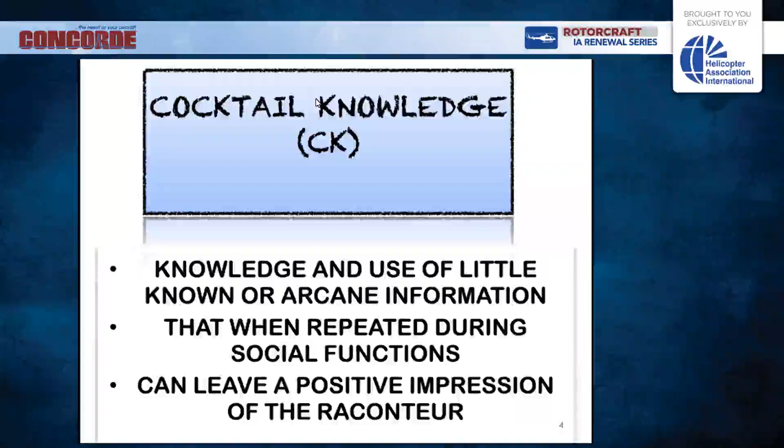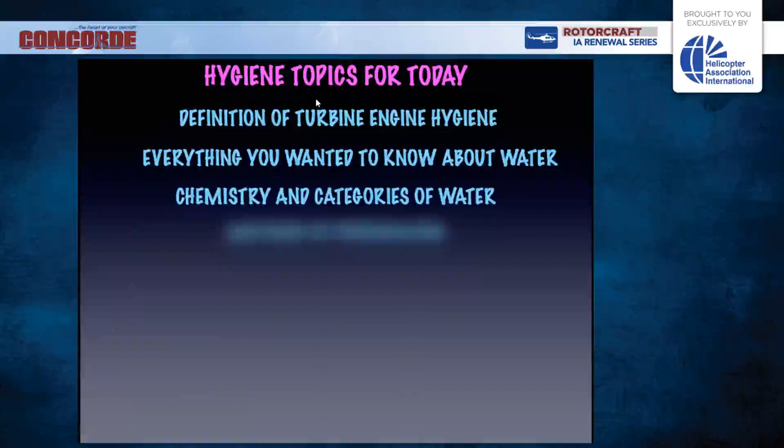So the topics for today: we're going to have a definition of turbine engine hygiene. We're going to talk about everything you always wanted to know about water. We're going to talk about the chemistry and categories of water, methods of purification, chemistry and agents of corrosion, air and airborne contaminants and erosion, a brief review of turbine engine operation, and then the benefits of proper turbine engine hygiene.

So I equate turbine engine hygiene much to like brushing your teeth. And I'm sure if I was to ask for a show of hands, everybody would say that they all brush their teeth. And when do you do it? You do it at night. That's the last activity that you do before you go to bed. And you do it so that you can keep those teeth rather than have them replaced by some choppers.

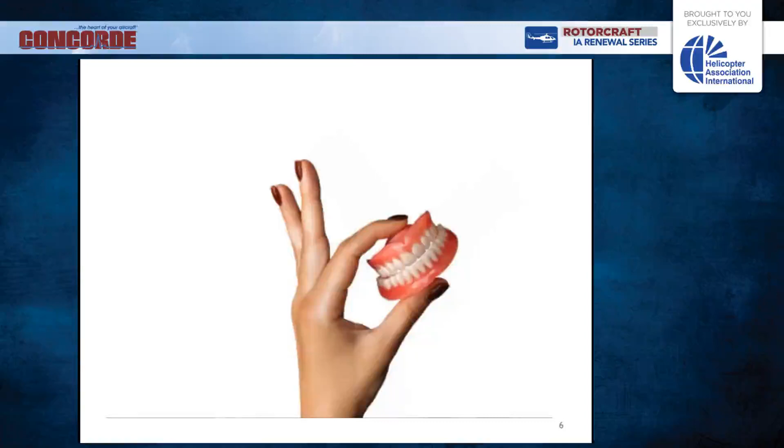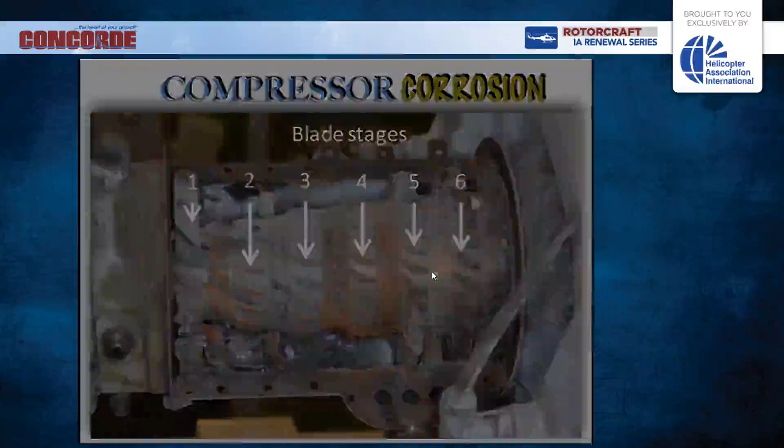So what is turbine engine hygiene? It is an engine cleaning function that, using dihydrogen monoxide as the medium, when routinely performed is conducive to prevention of corrosion, preservation of engine performance, and reduction of operating costs. And we'll go through each one of those things as we progress.

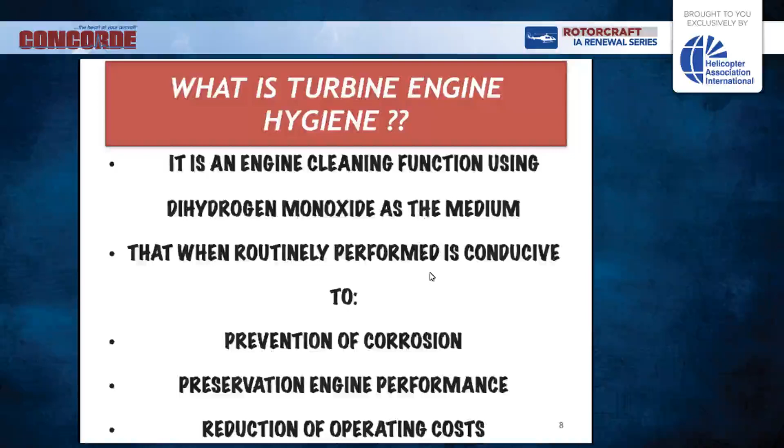OEM recommended solution for turbine engine hygiene is dihydrogen monoxide. Cocktail knowledge alert, that's our first one. What is dihydrogen monoxide? It's water.

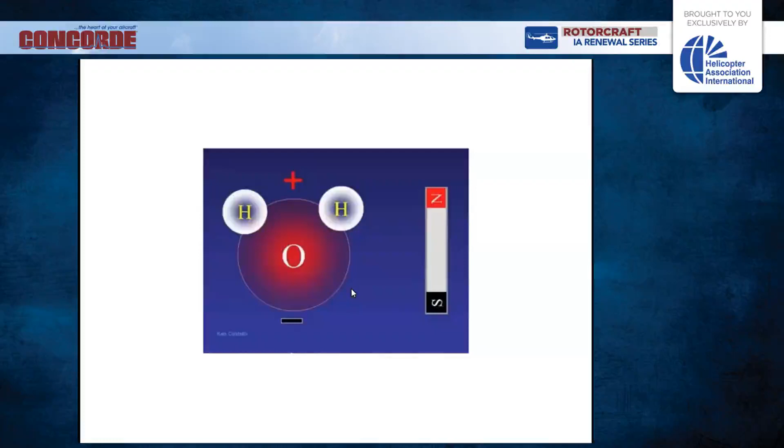The chemistry of water is such, it looks like a little Mickey Mouse face here with the hydrogen ears on either side, the positive side of the molecule, and oxygen with the smile, or negative oxygen. They are attracted to one another. This forms H2O, or water. These droplets all get together. They have a north and a south pole, the positive side would be north and the negative side would be south. They are attracted to one another, and as they attract to one another, they form drips or drops like you see here. And the drops all get together and form a big collection of water, as you see here.

So water is a multi-purpose liquid. By that, I mean water is colorless, odorless, and tasteless. It's essential for the sustenance of life. It's an additive to food and beverages. It's a coolant for engines and machinery.

It's a household cleaner. It's used as a fire retardant. And it's the universal dissolvent.

All of these I'm sure you're aware of, but I'm sure you don't understand what the universal dissolvent might mean. Well, let's take a look at the word dissolvent.

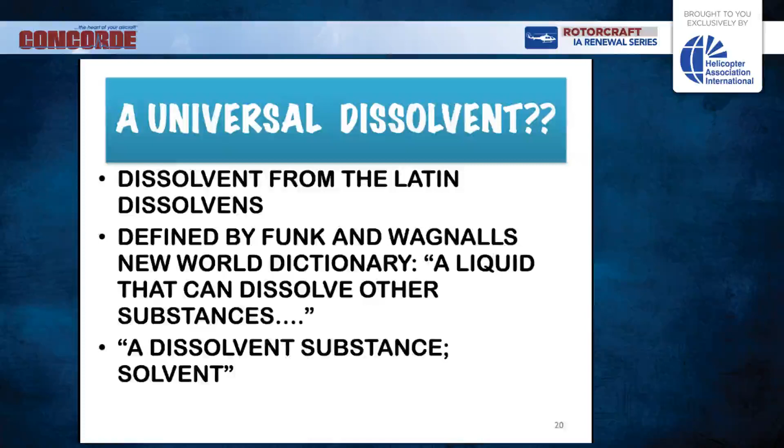Dissolvent, from the Latin dissolve, dissolvens, defined by Funk and Wagnalls New World Dictionary, a liquid that can dissolve other substances. A dissolvent substance, a solvent.

So as a universal dissolvent, water will absorb certain non-organic chemicals. This is the combination of salt, sodium, and chloride. Now look what happens when they are attracted to one another.

The positive side of the sodium goes over to the negative side of the oxygen, and the positive side of the hydrogen connects the chloride.

Let me show you in a demonstration here. Pour some water in a glass, pour a little salt into the glass, and stir it up.

And what we have is, you can see the salt is dissolved and becomes part of the solution for the water. Now, every solution is unique in its reaction to stimuli.

Let me show you what happens when we pour water in a glass and stimulate the edges of it. You'll get a unique sound out of the water.

Okay, now we have a solution of water, and we pour it into a glass and do the same test, and we'll get a different reaction to wetting the sides of the glass.

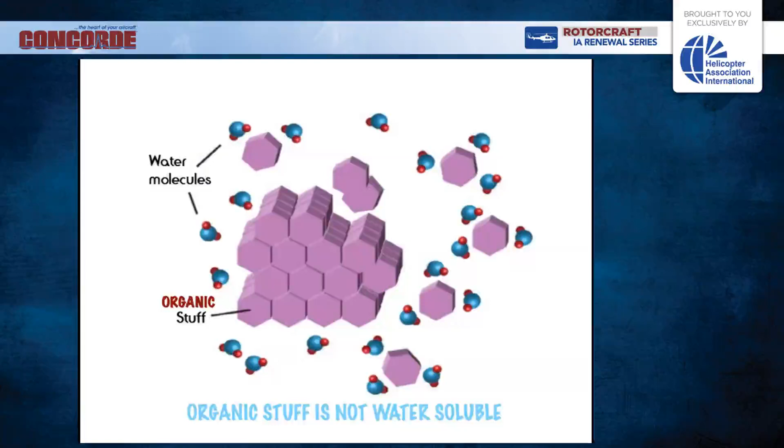But it will not absorb it like it does with salt or inorganic materials. So organic stuff is not water soluble.

And just to demonstrate, here is a mound of clay and water flowing over it. You can see that it's changing its shape. It's pushing it around, but it is not absorbing it. When we get done with this experiment here, you'll see that there's just nothing but a pile of the clay, the same amount that was there before the water flowed over it.

So therefore, oil is organic and also not water soluble. That's why it floats on top of the water. It will not be absorbed by the water. Therefore, oil is not dissolved by water.

Here's what happens. You put a water droplet in with the oil, and it is not attracted to it, they are not attracted to each other.

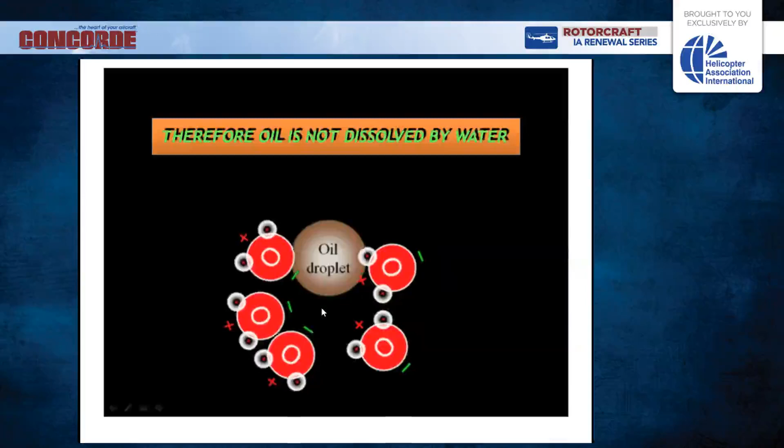So water is essential in cleaning. We've determined that. So how do we get rid of the grease and the oil if the oil and the grease are not affected by water? Water needs help when it comes to removing grease and oil.

And how do we do that? We remove grease and oil using a detergent, soap, or SO4, sulfur tetroxide.

The negative tetroxide of the SO4 is attracted to the positive side of the water.

The sulfur leg of the SO4 attaches itself to the oil, and together the oil, the SO4, and the H2O flow down the drain. So this is what happens during the chemical reaction of soap and water against oil.

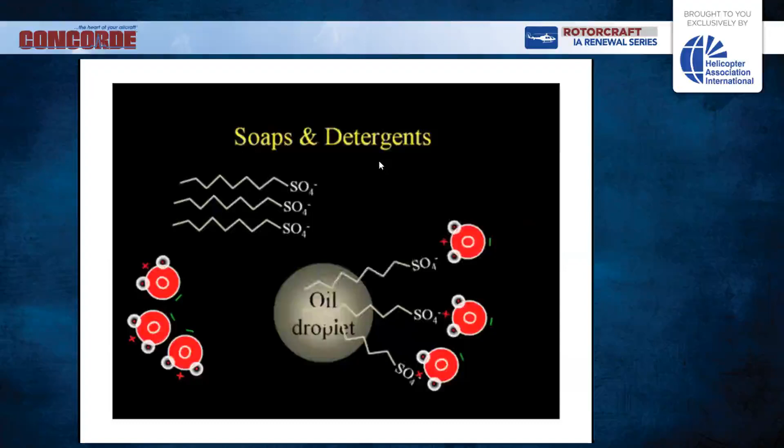And as you heat up water, just as an added bit of information, that's why your mom always told you to heat the water up. It will remove the oil at a faster rate. So that's why you heat the water when you go to wash your hands. All right.

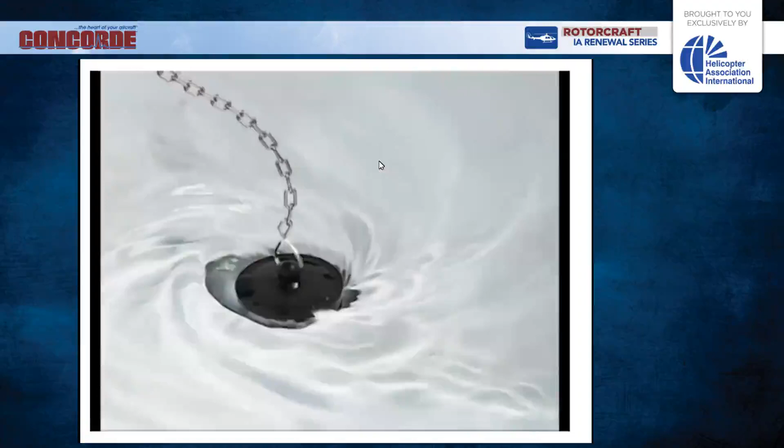So the water, the soap, and the oil all end up going down the drain together.

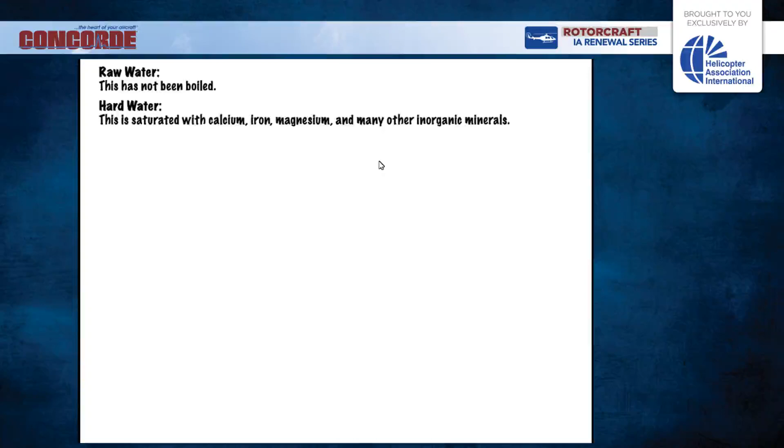So let's go through the categories of water. There's raw water, which has not been boiled. Hard water, this is saturated with calcium, iron, magnesium, and many other inorganic minerals.

Boiled water, boiling helps remove some of the germs, but it concentrates the inorganic minerals and deposits them on the side of the container.

Rainwater or snow. Now this has been condensed from the clouds. The first drop is distilled water, but when it falls as rain, it can pick up germs, dust, smoke, and minerals.

Strontium-90, a little bit more cocktail information. Strontium-90 is what's left in the atmosphere from atom bomb testing 70 years ago. It's amazing that stuff is still around. Lead and many other atmospheric chemicals.

By the time the rainwater reaches the earth, it can be so saturated with dust and pollution that it may even be yellowish in color. So water in this category is acting like an atmospheric purifier, much in the same way as it acts when it's used upon your engines to remove the contaminants.

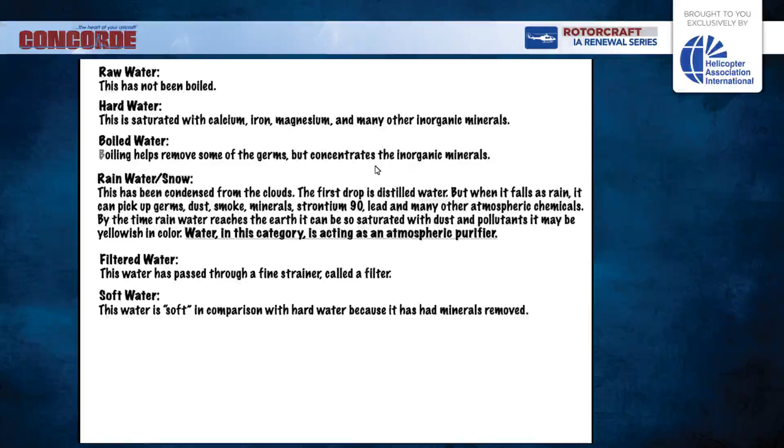Filtered water, of course, passed through a fine strainer, called a filter. Soft water. The water is soft in comparison with hard because it has had the minerals removed. Hard water has still got the calcium and stuff in it; we remove that. That's how you get soft water.

Reverse osmosis. This is a system of water purification which allows the water to be forced through a semi-permeable membrane to separate the impurities. And of course, deionized water. This is water that has had almost all of the mineral ions removed via an ion exchange process. AKA, that's how you get soft water.

And of course, distilled water, which is the purest form of water. This is water that has first been heated into steam, separating the H2O molecules from the contaminants. During this vapor phase change process, the water volume increases by a factor of 1600 so that all the contaminants are released and left behind. Then through condensation, the steam returns to liquid, minus all of the impurities.

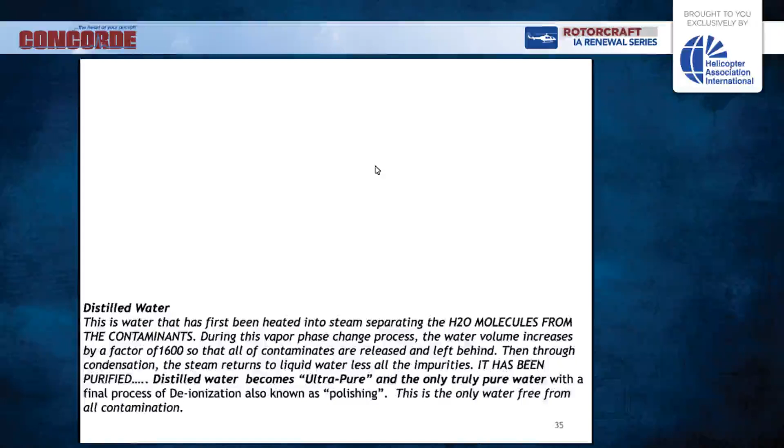It has been purified. Distilled water becomes ultra pure and only truly pure water with a final process of deionization known as polishing. This is water that is free from all contamination, enhanced, ultra pure, and distilled.

Of course, now we've got polluted water. Little cocktail knowledge here. The Great Pacific Garbage Patch contains 79,000 tons of discarded plastic. This is plastic that has made it to the ocean and is now trying to get over to Hawaii. Covering an area of about 617,800 square miles, it's twice the size of the state of Texas.

So we know water attracts inorganic stuff. This is the inorganic stuff that it will attract: ash, calcium, magnesium, chloride, sodium, sulfate. How do we get the inorganic stuff out and get the pure water in for cleaning? Well, we use filtration, reverse osmosis, which we partly described, deionization, and of course, distillation.

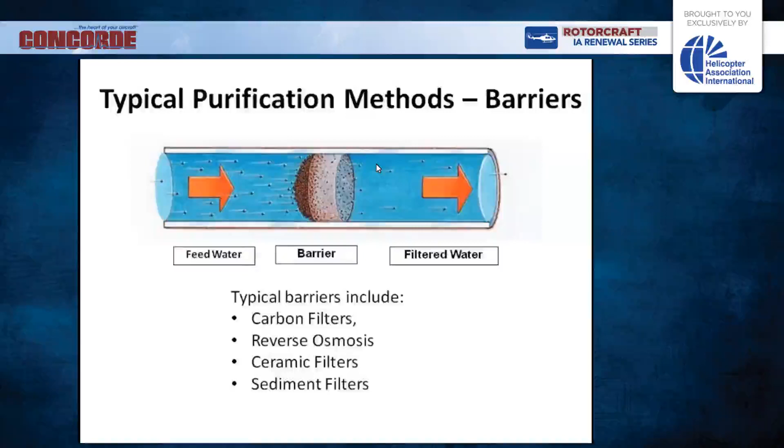Filtration. This is typical filtration, a barrier. The contaminated water enters one side, the contaminants are held by the filter, and the filtered water goes through the other side. Typical barriers include carbon filters, reverse osmosis, ceramic filters, and sediment filters.

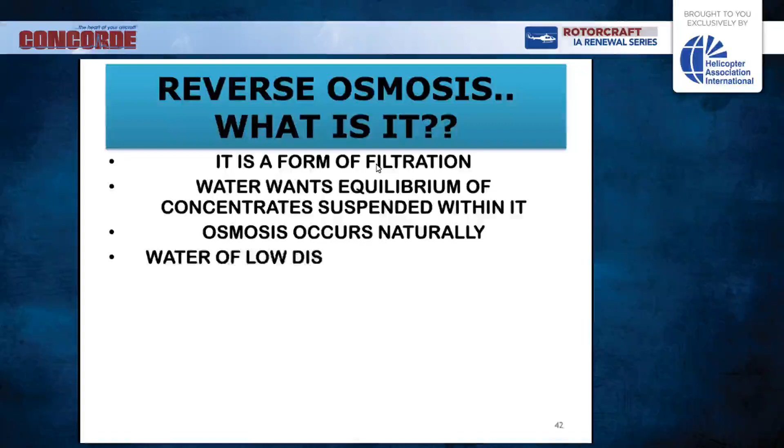So reverse osmosis, what exactly is it? It is a form of filtration. Water wants equilibrium of concentrates suspended within it. Osmosis occurs naturally. Water of a low dissolved concentrate will move through a filter to mix with the water of a high dissolved concentrate on the other side, seeking equilibrium. Reverse osmosis occurs when pressure is applied to the water of the high dissolved concentrate, forcing it in reverse through the filter to join the water of the low dissolved concentrate.

This is how they use seawater out on the cruise ships in order for you to get fresh water for your showers and your ice for your drinks. They pressurize the salt water, forcing it through a filter, depositing the salt on the one side of the filter, and combining with the fresh water and sending it out throughout the ship.

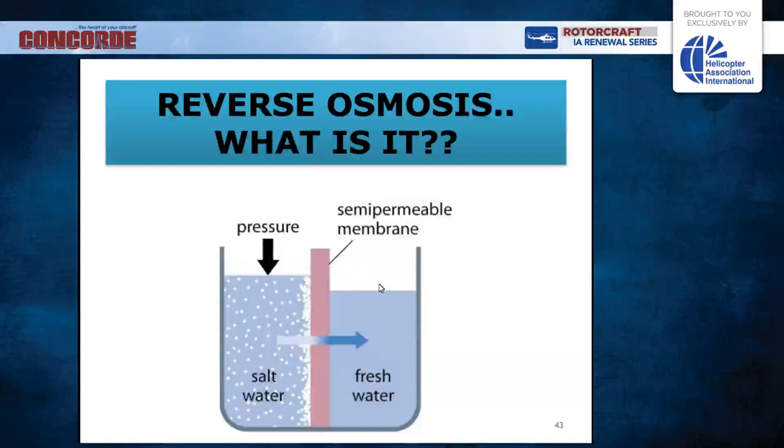Cocktail knowledge alert. Your sweat glands use osmosis. Your body doesn't pump water to your skin. It deposits a little bit of salt inside each of your sweat glands. And since your body is 70% water, it's attracted to this salt.

Great stuff you guys are learning here. You can use this and impress many people.

And the water containing these minerals comes through the one side. The ion exchange material is hydrogen, called cations, and hydroxide, called anions. The ion exchange resins are solid polymer materials that hold fixed positive and negative charges. These charges are exchanged with the mobile cations, the positive ions, and the anions, the negative ions, which produces an ion exchange.

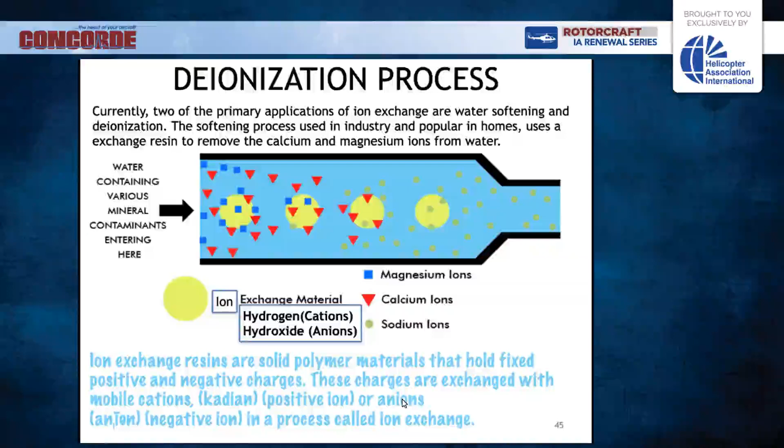And of course, we have distillation. Distillation occurs naturally in the world. The water is evaporated by the sun, condensed into clouds, and then the clouds form and drop the water in the form of precipitation. And that's the purest form of water right there.

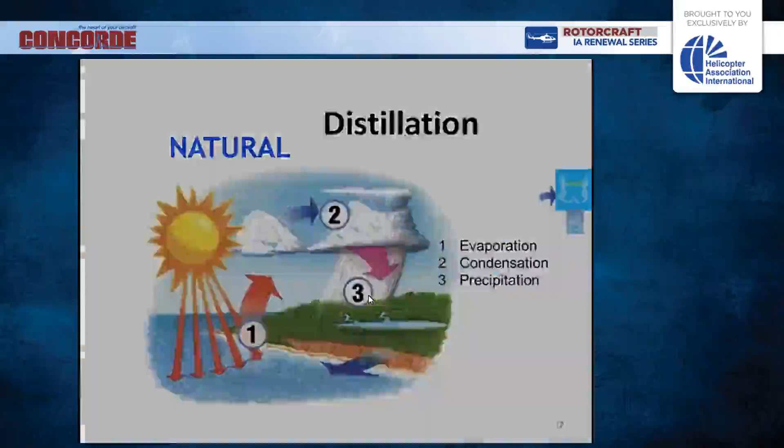Aviation distillation system. It's the same thing as what happens in nature. You get the water, it goes through the evaporation process where it is condensed and drops off all of the inorganic chemicals that are held or suspended within the water. The now condensed steam turns into water and precipitates into the holding tank, and you have pure H2O to be used for, well, you can even use it for coffee, or you can use it for cleaning your turbine engine.

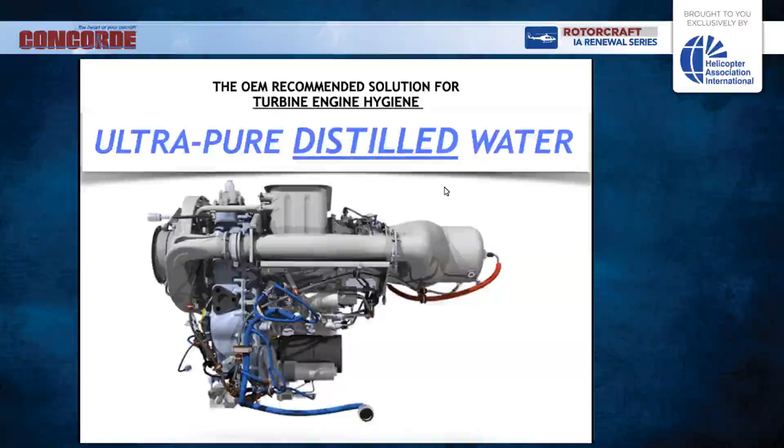The OEM recommended solution for turbine engine hygiene then is ultra pure distilled water. That's a picture, of course, of the Rolls-Royce 250 C30 engine. So distillation is the most consistent method of purifying water for aviation purposes. Reverse osmosis and the carbon filter, of course, drop off as the filters become overburdened with the debris that they're picking up and have to be changed over each period of time. So the most consistent, of course, is distillation.

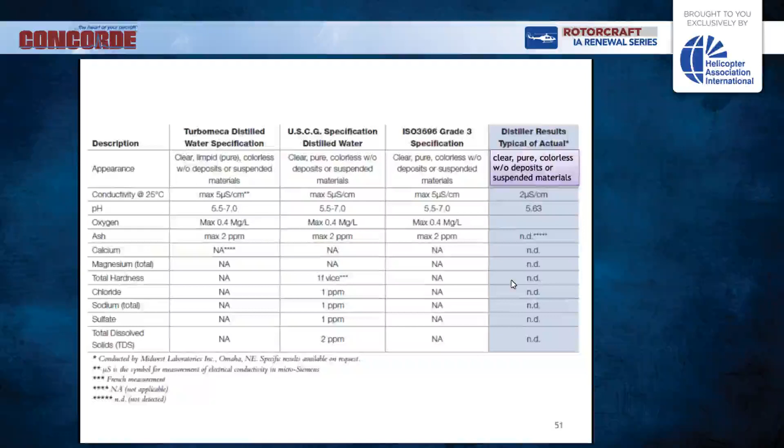So why perform turbine engine hygiene? Because the OEM says engine cleanliness is conducive to prevention of corrosion, preservation of engine performance, and reduction of engine operating costs. And we'll get to those here in just a few minutes.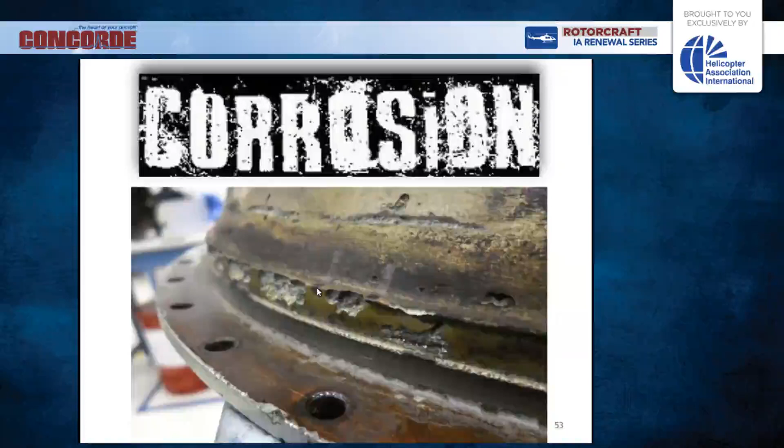So let's talk about corrosion. It's the silent consumer. You see the results of corrosion, but you don't see it actually happening. As you can see, it has left its mark here on this turbine engine support with the pitting, and this was all caused by contaminated water or moisture that has been allowed to lay on here without being removed.

So the chemistry of corrosion. Corrosion is the deterioration of a material due to direct chemical attack. The salts hold the moisture on the surface and promote corrosion in unprotected metals. Chloride solutions break down the protective film on magnesium and aluminum. Corrosion increases with humidity.

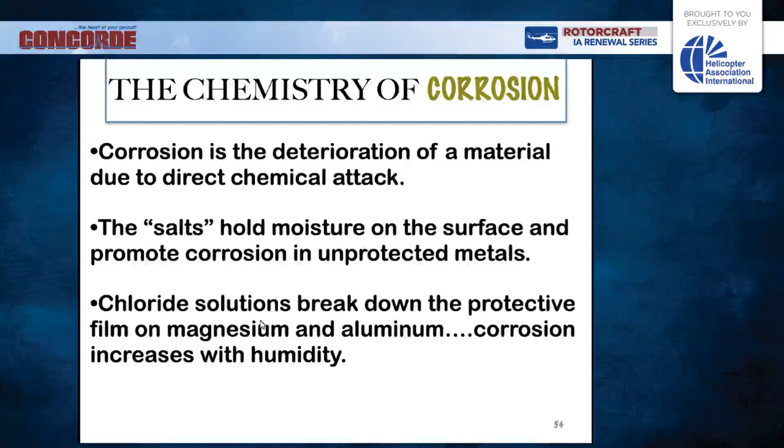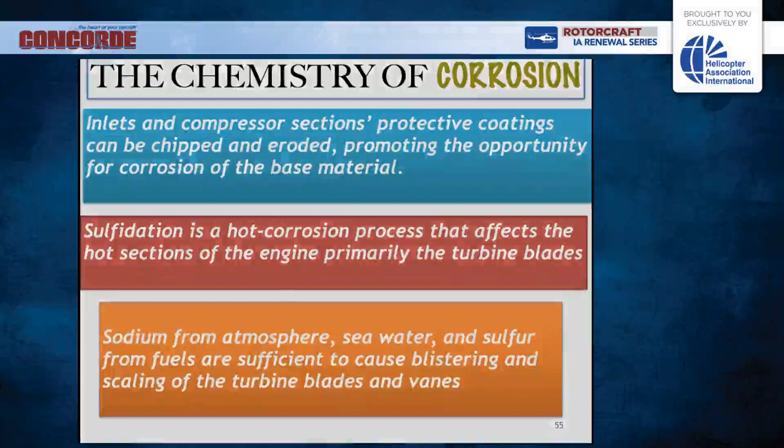In inlets and compressor sections, protective coatings can be chipped and eroded away by erosion, promoting the opportunity for corrosion of the base material. So corrosion and erosion, as you will see, work hand in hand to destroy the engines. And then we have sulfidation, which you've all heard the term, but it's a hot corrosion process that affects the hot sections of the engine, primarily the turbine blades. Sodium from the atmosphere, seawater, and sulfur from the fuels are sufficient to cause blistering and scaling of the turbine blades and vanes.

Agents of corrosion. Airborne contaminants, these are what is floating around in the air, are particulate pollutants, gaseous pollutants, sulfur dioxide, nitrogen oxide, acid rain, smog, wildfire ash, volcanic activity, sand. All of this stuff is floating around, and it's ready to attack and corrode our helicopter as it's trying to do its job. So how do we stop corrosion?

And these are the pollutants as they are floating around in the air, and these are the things that they affect. And not only are they just floating around in the air, we also produce them on the ground. So how do we stop corrosion? Well, we can do that in a couple of ways. One is we can wrap the helicopter up in a condom, makes it safe for corrosion, but it's not very practical when it comes to flying. So that's kind of out of the picture.

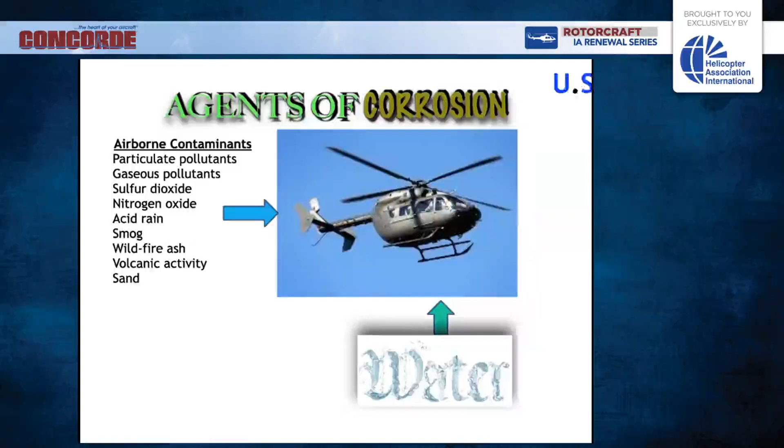U.S. airborne contaminant ratio. Now, you guys that are sitting in the Midwest thinking that you're probably in the purest air that the U.S. has to manage, it's not quite as pure as you might think. The center states, Iowa, Missouri, Kansas, Nebraska, all have mild categories of corrosion contamination. Then it becomes moderate as you move west, and of course heavy and severe as you move towards the coast. Same thing with the east. The green is heavy, and the severe is along the coast.

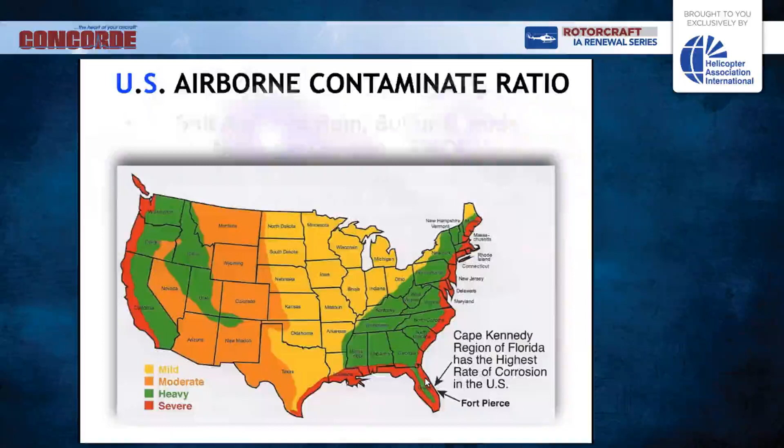It's amazing to me that the Cape Kennedy region of Florida, which is where we launch a lot of our rockets, has the highest rate of corrosion in the U.S. So salt, air, acid rain, sulfur dioxide, nitrogen oxide, smog, all of these things are floating around in the air, ready to attack. Now the air, which contains all of these nice pollutants, and there they are, held by the air, they're ready to attack and eat.

So the engine forces the air to work to create power. Air is basically lazy. It floats around all day, doesn't do much of anything until it is intrigued by a turbine engine and is drawn in to do work. First it's compressed, and then it's burned, and then is exercised to produce power. Air does not work for free. The contaminants within the air are corrosive, and the movement of the air through the engine is erosive.

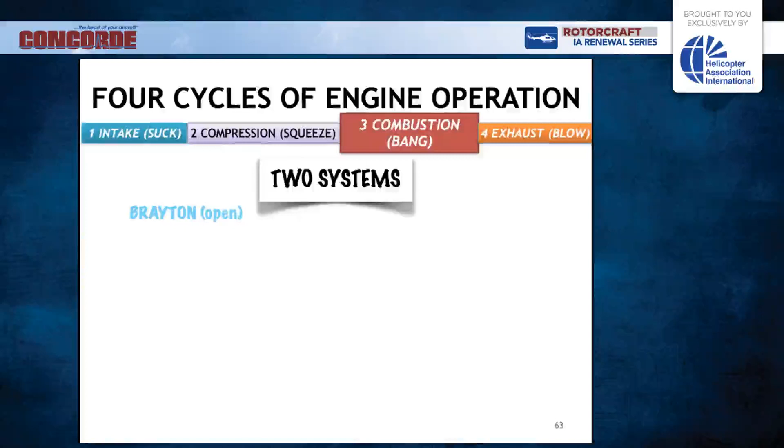So let's take a look at the quick foray here into the 4 cycles of the engine operation. You know, the intake, the compression, the combustion, and of course the exhaust. There are 2 systems: the Brayton or the open cycle, which is what a turbine engine is, and it draws the air in. And if you'll notice, the compressor becomes smaller as the air progresses through it. This is to cause the air to be compressed. In other words, to move a greater amount of air molecules into a smaller area.

Once the air is compressed, it moves over where it is introduced to a 3,000 degree flame and gains energy there for combustion. It now moves and has to expend its energy on turning turbine wheels in the turbine. As it expends its energy, it needs a bigger and bigger area upon which to push, and thus the larger turbine wheels are at the exit of the turbine. You get work out, and then of course the air, after it's done all of this stuff, is exhausted and leaves through the exhaust system.

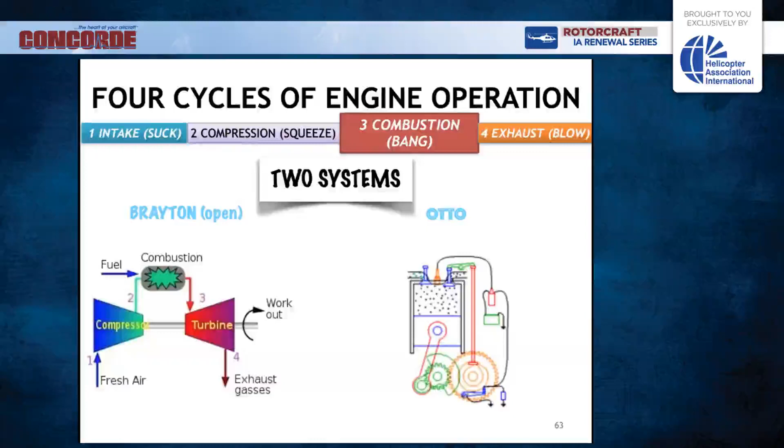Next, you have the Otto cycle, which is what you're all familiar with. That's what you drove to work today. Piston, of course, moving up and down, valves opening and closing, allowing fuel and air mixture ratio and exhausting out. This is a cutaway, which is kind of a neat cutaway. It actually rotates and shows you how things work inside of a Rolls-Royce 250 C20B engine.

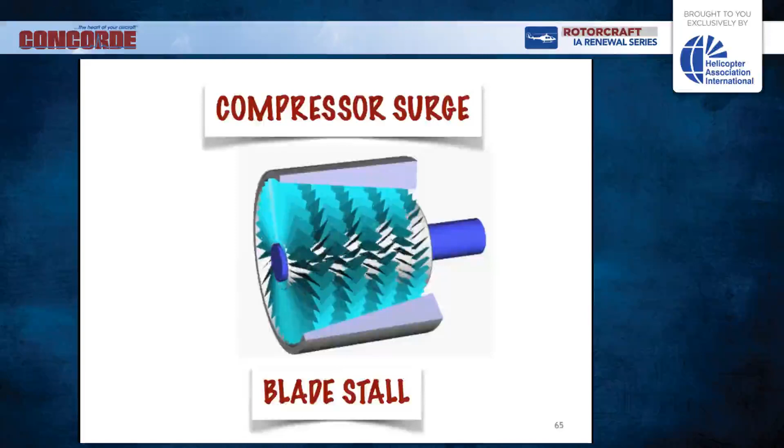But first, I want to talk about two terms that are interchanged with one another, which is actually kind of incorrect: compressor surge and compressor stall. Let's discuss the theory of lift real quick so that you understand what I'm talking about. We're going to use Daniel Bernoulli's equation, which is the difference in pressure produces lift. Longer path, equal transit. In other words, you have an airfoil and the air moves, it is greeted by the nose of the airfoil. It splits. Part of it goes underneath the airfoil, part of it goes over the top.

The part that goes over the top increases in velocity so that it can catch up with the lower velocity air that goes underneath. Low velocity creates a high pressure. High velocity creates a low pressure. Air flows from a high to a low, and therefore you get lift. That's the simple process of lift. That's the way it works on wings. That's the way it works on airfoils within the compressor.

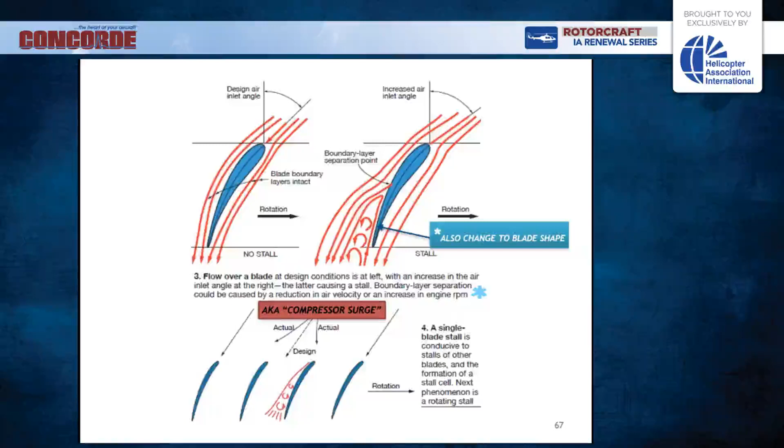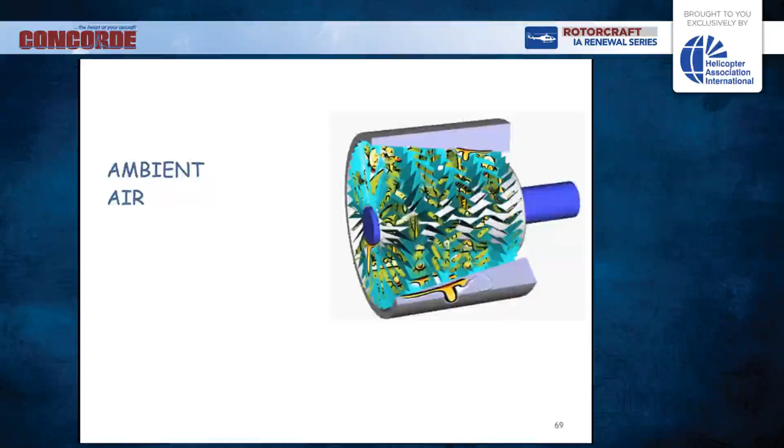So we have the ambient air full of all of the contaminants beating up on this compressor. And then we have air movement, which is erosive action, also beating up on this compressor, removing material as it flows through. What you get is the corrosive materials deposited on the compressor blades by the air movement through, and you also get material removed from the blades as the air goes through.

Real quick on the airflow going through the engine. Air pressure as it moves through the engine increases until it gets to the exit, the entrance of the diffuser. There it levels out and then drops off. Air pressure has to drop off or it would never flow from the compressor to the turbine, from a high to a low. That's the theory.

Velocity drops off, creating a higher pressure until you get to the inlet of the diffuser. There it slows down until it reaches the tip of the flame at the combustion section and speeds up. It speeds up to the point where it enters the turbine section and is angled such that it produces a good flow across the turbine blades and produces work pushing the turbine blades on the first stage turbine wheels. And then again, going through a turbine nozzle that directs the air properly through to the second stage, and then the same thing happens there. And then the air velocity drops off going through.

And of course, temperature increases going into the compressor. Now, everybody calls the compressor the cold section. But if you look, you'll see it's somewhere around 500 to 600 degrees Fahrenheit at the entrance of the diffuser. That's hot enough to cook cookies. So it's plenty warm. Why does it warm up? Because the air molecules, as they're being compressed into a smaller and smaller chamber, they begin to strike each other more often. And this collision causes the temperature of the air to go up.

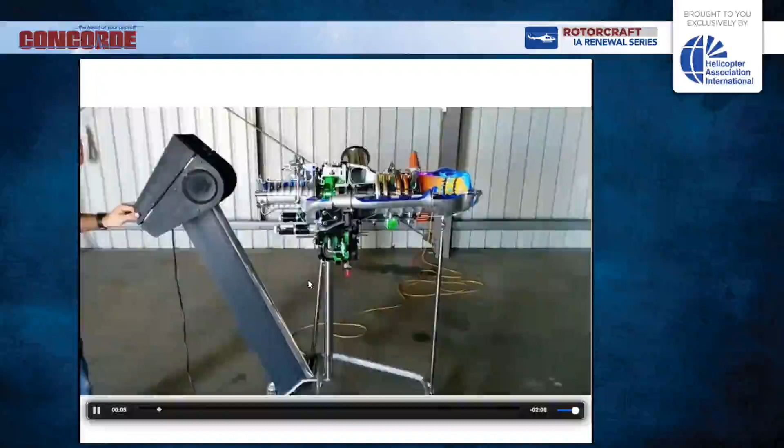So let's fire up this turbine, and I'll explain some stuff as it's going along. It should all sound familiar as the turbine is about to light off.

Now you see the airflow from the compressor as it's going through. It's a 7-to-1 compression ratio. It's deposited here from the diffuser, down the transfer tube.

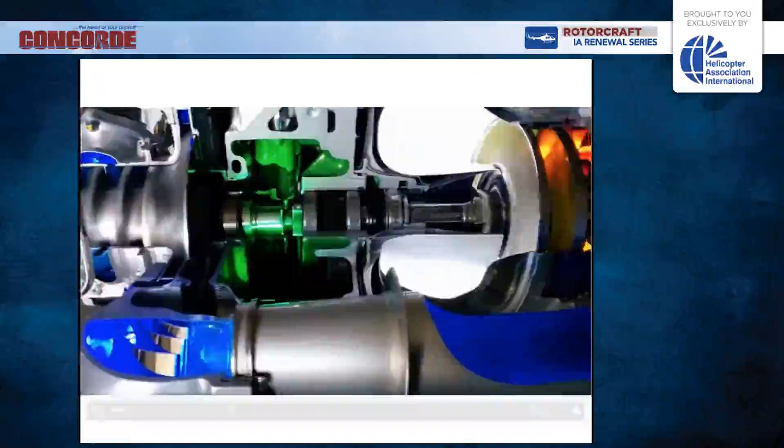To the combustion section, where it is greeted by the fuel and the 3,000 degree flame. The air, now being super energized, is doing work pushing on the N1 section, which is driving the compressor, and then the free air that's remaining from there turns the N2 section, which drives the gearbox.

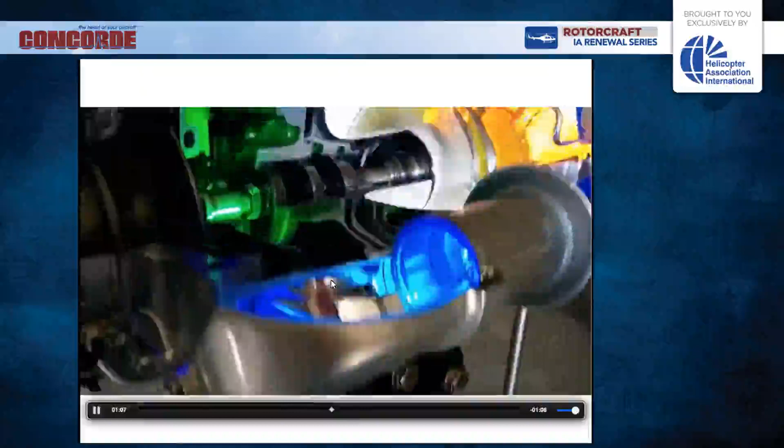At 100% RPM, you'll get about 50,000 RPM for the compressor and N1 turbine, 33,000 RPM for the N2 section driving the gearbox, and you get a 6,016 output shaft speed. That 6,016 output shaft speed is about standard throughout the industry for all turboshaft engines.

Now, something interesting to note, and you all wonder why we do a 2-minute cool down or 3-minute cool down on the Rolls-Royce engine. It's because of the labyrinth seal arrangement between the N1 and the N2 section, keeping the oil within the bearing surfaces.

When the engine shuts off, you notice the first thing that goes away would be the air pressure that controls the pressure on the labyrinth seal. The labyrinth seal now cannot, since it has no air pressure, keep the oil from migrating past its position on the 6 and 7 bearing cavity.

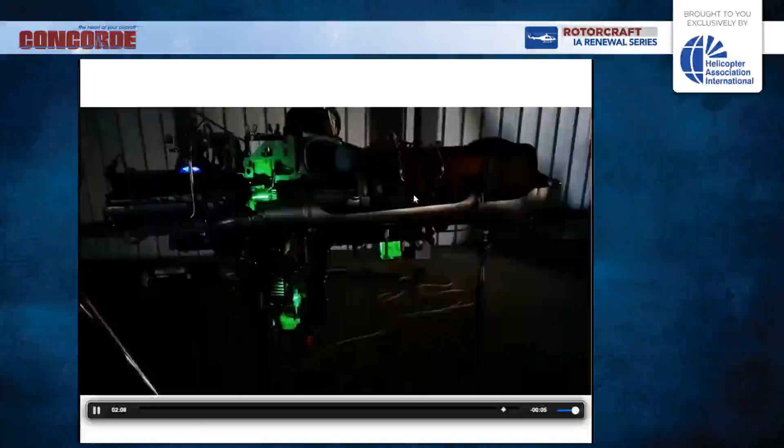Now the oil will lay on this warm labyrinth seal, and because of the temperature of the labyrinth seal, it can cook and become coke. The rotating part of the labyrinth seal will then grow enough coke to where it can attach itself to the stationary section, and you will get what they conveniently call N2 lockup.

What you do during a cool down is normalize the temperature of that section, running the temperature down to the point where the skin temperature becomes lower than what it takes to turn the liquid oil into carbon, and you don't get into lockup. Thus the 2 to 3 minute cool down on the Rolls-Royce engines.

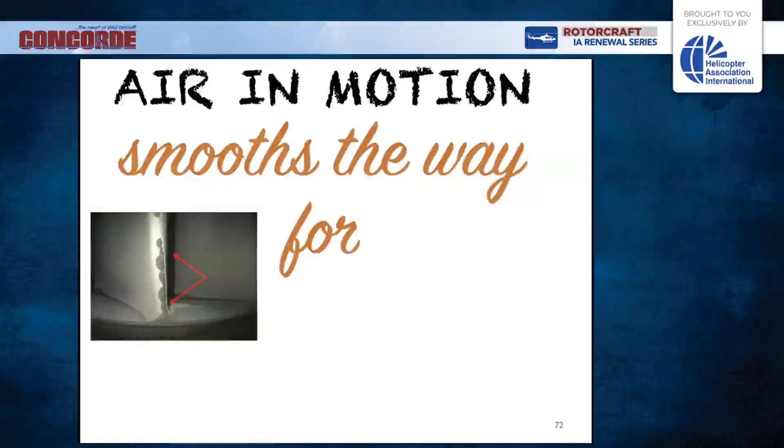Air in motion smooths the way for erosion, removing all of the coating that protects the base material. It keeps the contaminant in place and allows these contaminants to attack this base material and create corrosion. Erosion and corrosion work in concert to create compressor corrosion.

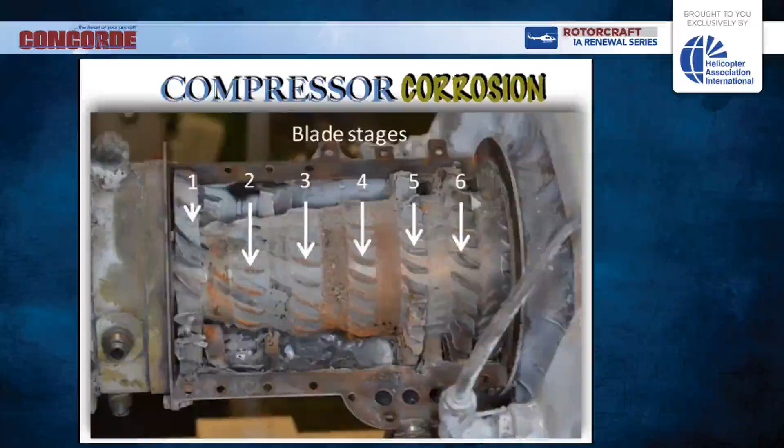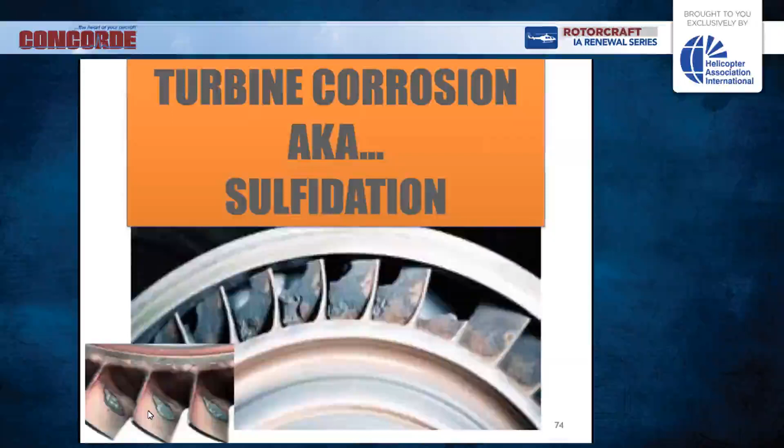So what is sulfidation? All hydrocarbon petroleum-based fuels contain trace amounts of sulfur after refining. Sulfur, also a byproduct of combustion, is mixed with the incoming airborne salts and deposited on the surface of the gas path components. Then, aided by the velocity and temperature of the airflow, this corrosive and erosive airborne cocktail attacks the protective oxide coating on the turbine components, eventually exposing the base metal and producing a corrosive reaction. This corrosive reaction occurs at high temperature environments and is categorized by type.

Type 1 is between 825 to 950 degrees. This is when a lot of the accidental hot starts are taking place, and this is the temperature range you're in. That's why you see the extreme burning and displacement of metal upon the turbine wheels during a hot start.

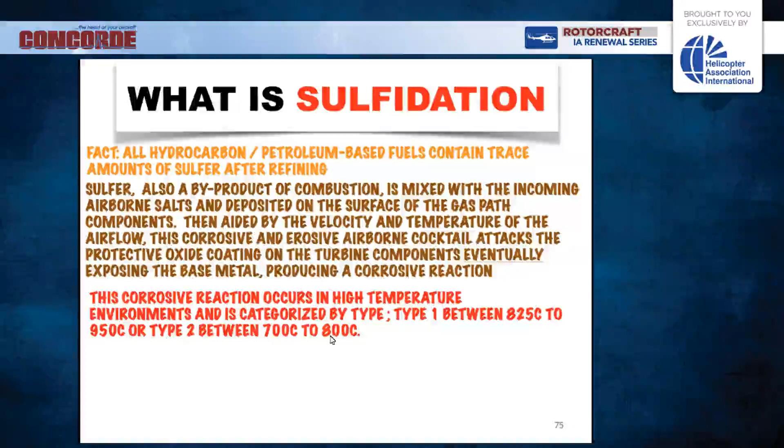A hot start is producing more fuel, and the flame is looking for air to support itself, and it will draw air from wherever it can. If it can't catch it in the combustion section, it will move down past the first stage turbine wheel and perhaps even find it near the second stage turbine wheel and burn that wheel, which would leave the first stage kind of unmolested, making you think that you didn't have any damage to your turbine on a hot start. But basically it's downstream because the fuel is looking for air and finds it downstream.

So air and its gang of toxins give the gifts that keep on giving. You get corrosion, and erosion.

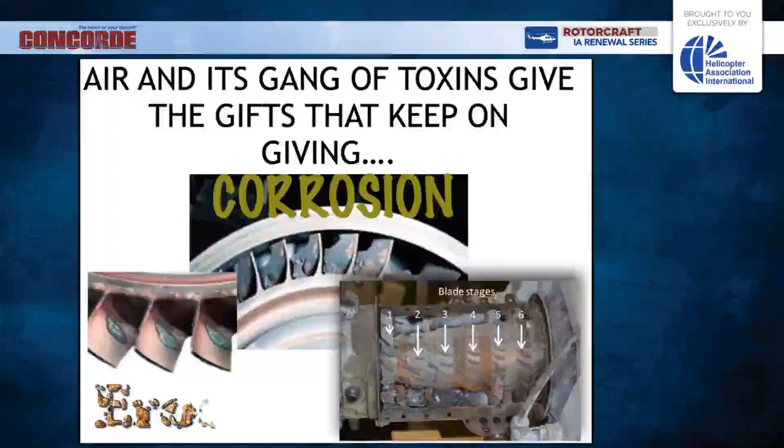So all engine manufacturers agree the single most proactive task for the prevention of corrosion is to remove the salts and sulfides deposited along the gas path. All engine and airframe manufacturers recommend frequent rinses and washes with pure water. Daily rinses for all engines is recommended. Daily rinses are essential for engines operated within 25 miles of salt water. If you live near either one of those coasts, you should be rinsing after the last flight of every day. All rinse and wash operations should take place after the last flight of the day.

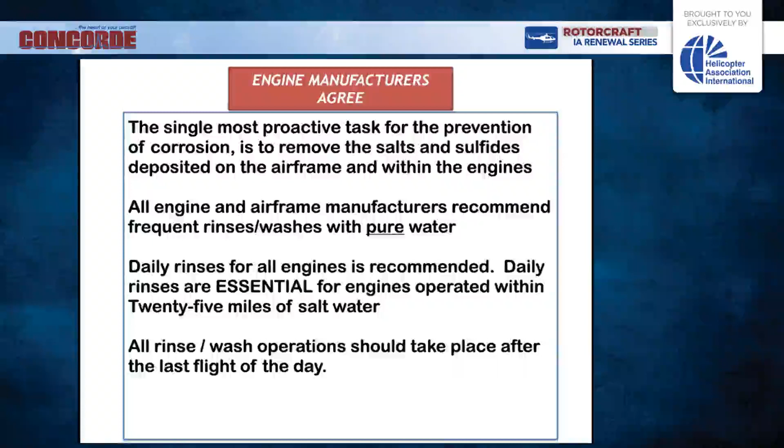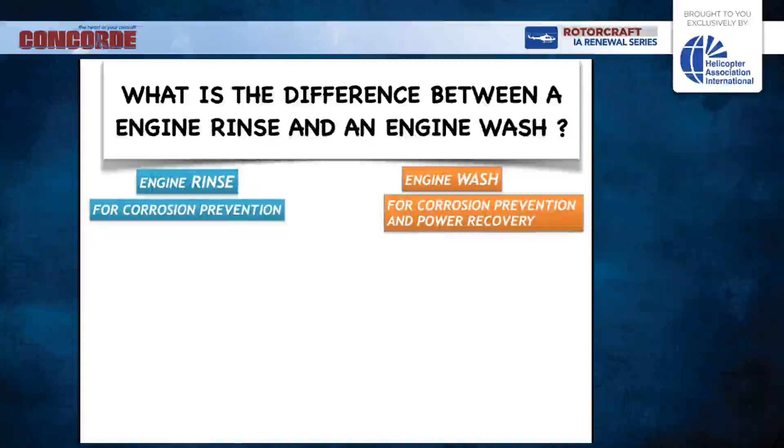So what's the difference between an engine rinse and an engine wash? Let's take a look at them. For corrosion prevention, that's when you do an engine rinse. For corrosion prevention and perhaps for power recovery, the pilot comes back and says, hey, the thing is running a little warmer than it did when we first took off. How about we do a compressor wash just to see if we've got some contaminants on the blades that are taking away from the efficiency of the compressor and turbine.

And you are finished. With the engine wash, you perform a rinse operation. In other words, once you get the soap on there and you think you've removed all of the contaminants, then you need to wash that soap off. Leaving the soap on there can be just as bad as if you hadn't done a compressor wash at all. That stuff can be corrosive on its own, so you want to rinse it all the way off and then complete a drying run.

And perform a power check. That's the cheapest way to determine if you've got just a dirty compressor or if you have something else going on within the engine, after doing a compressor wash.

And you have a happy running helicopter if you do that. So municipal water, that should be okay. We drink it, it should be okay, right?

Nope. Contaminants in municipal water, the chlorides, the metal salts, and the sulfates are corrosive.

Distilled water versus municipal water and magnesium. Using distilled water at room temperature, magnesium alloys rapidly form a protective film that prevents further corrosion. Small amounts of dissolved salts in municipal water, particularly chlorides or heavy metal salts, will break down the protective film locally, which usually results in pitting. The corrosion of magnesium alloys by fresh municipal water increases substantially with temperature.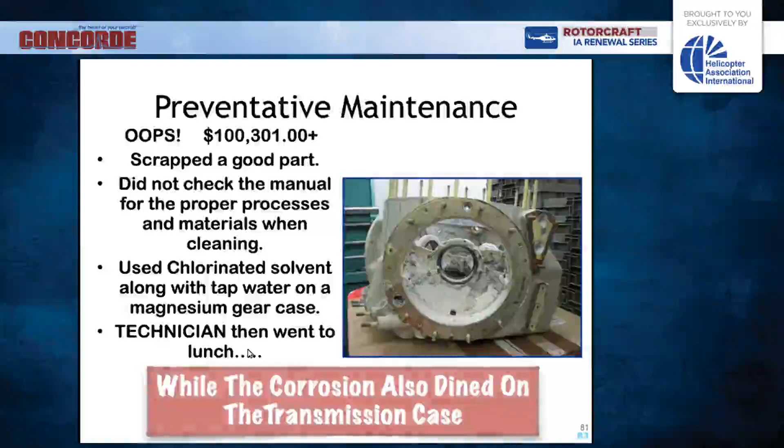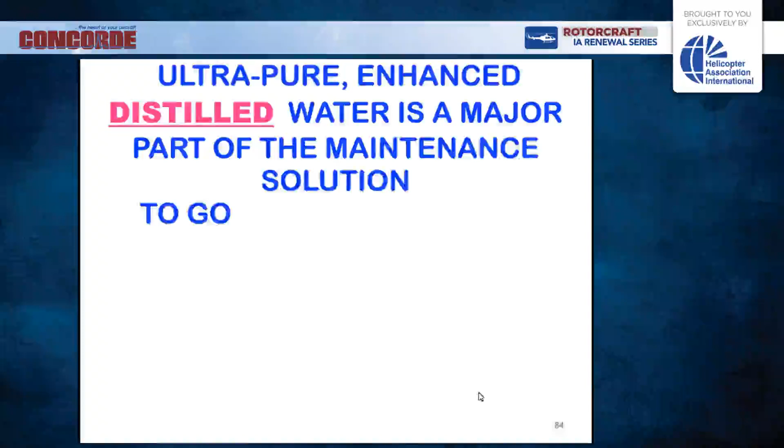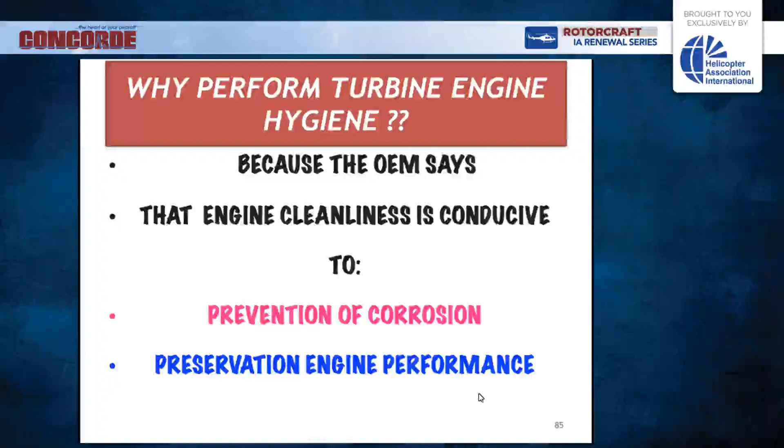So why do we perform turbine engine hygiene? Because the OEM says engine cleanliness is conducive to prevention of corrosion, preservation of engine performance, and reduction of operating costs.

Effective cleaning will maintain available power levels at or above OEM specifications. This can be verified by daily engine power checks. It reduces maintenance costs by increasing on-wing time. If it's flying, you're not working on it, and it's making money.

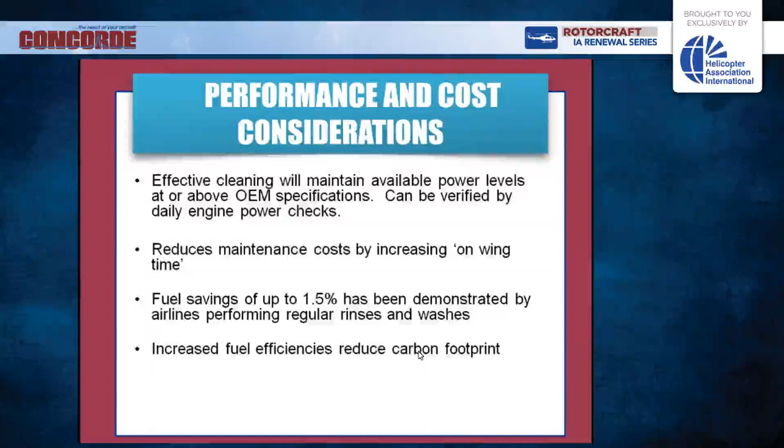Fuel savings of up to 1.5% have been demonstrated by airlines performing regular rinses and washes. Southwest does this on their aircraft after the last flight of the day at the airport outside. You'll see them out there rinsing their engines, and they've managed to save 1.5% on their fuel bill. That's a tremendous amount of money when you think about the amount of money that they spend on fuel each month. And of course, increased fuel efficiencies reduce the carbon footprint, so we're nice to the environment at the same time, and we get a happier running helicopter.

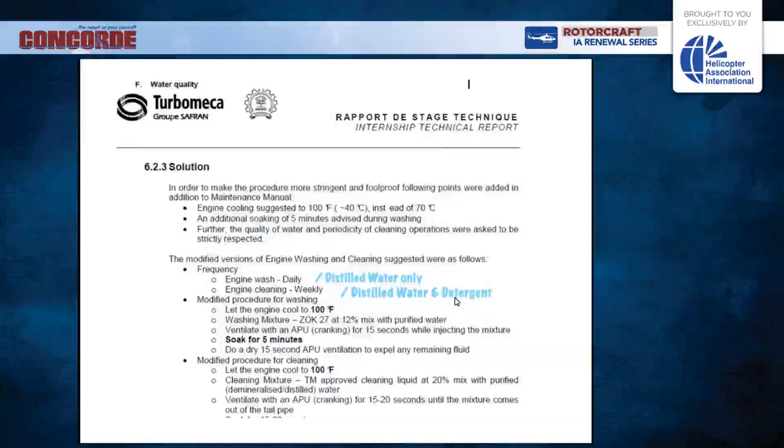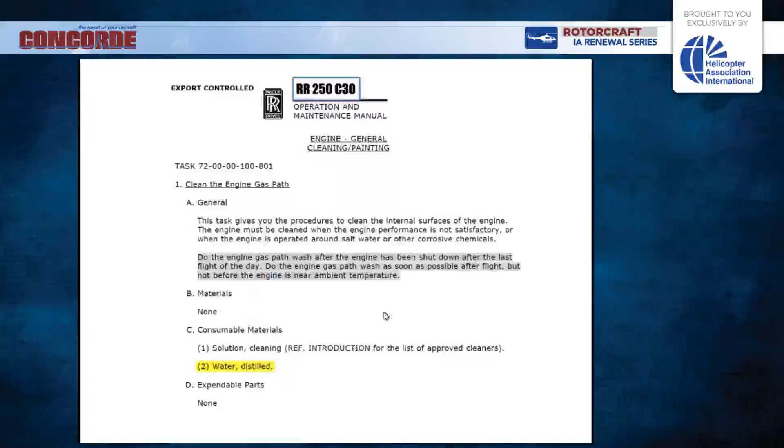So what is the difference between water from an aviation-specific distillation system and commercially distilled bottled water? I get that question all the time. I can go down to the local drugstore or market and buy a bottle of distilled water, leave it sitting around in 5-gallon bottles, and it should be fine, right? Not necessarily. Let me give you a comparison here between enhanced water from a distillation system and bottled water.

For corrosion prevention, both of them do the same thing. But the distillation system water is produced on-site and on demand. That's the difference right there. It's fresh when it's produced.

Bottled water is purchased and stored in a plastic container, and it's had the opportunity— you don't know the condition or cleanliness of the container when the water was first poured in there. And the water sitting against the plastic for who knows how long could also be picking up contaminants. So you don't really know that you're getting total distilled water. The quality of the water will be compromised over time.

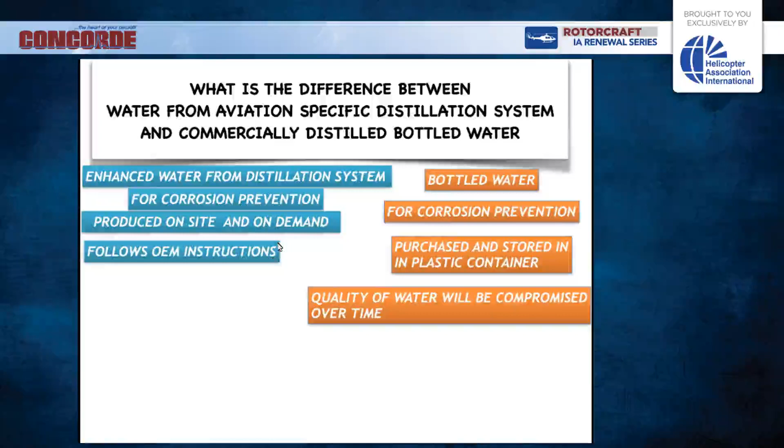The distillation system follows OEM instructions. This stuff stays the same each time you use it. Water quality is controlled, more economical. With bottled water, there's storage and disposal costs of the containers you've got to worry about, and usually it's not as cost effective as you might think.

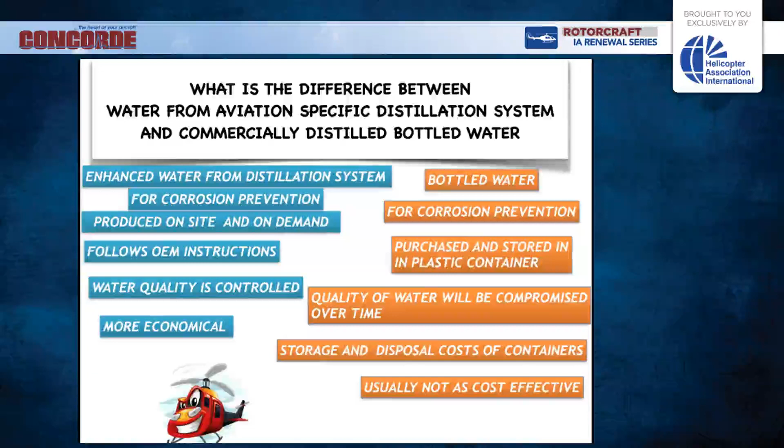Besides the obvious reasons for using distilled water, what is the side benefit gained in the process? Well, the final product is now enhanced ultra-pure water, right? This enhanced ultra-pure water is receptive to attracting and holding the contaminants it finds on the engine components as it flows through the engine. So you've got ultra-pure water, and it's magnetic, and it's looking for inorganic contaminants.

And as it's looking for them, it lifts them off of the engine components by the flow activity, and then it holds on to them because it's attracted to them. So it holds on to them and makes them part of the solution that is being flushed out the back end of the engine.

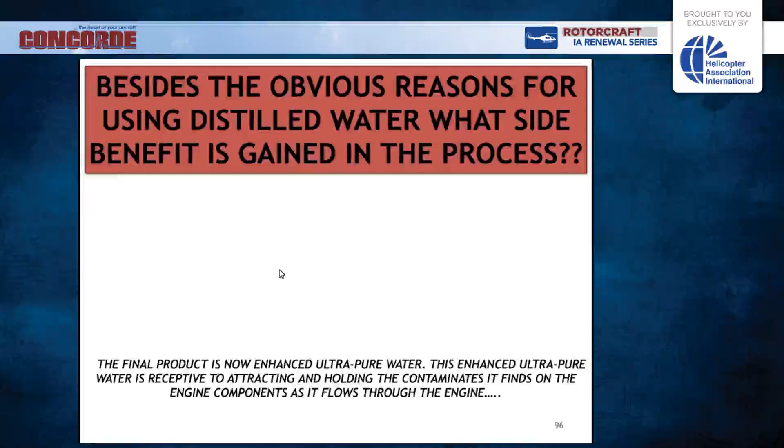So enhanced ultra-pure distilled water does double duty as it flows through the engine, keeping the thing clean.

And the end is near, so we're getting close here. Let's do a quick review. What is turbine engine hygiene? It's a maintenance function that through engine cleanliness is conducive to prevention of corrosion and erosion, preservation of engine performance, and reduction of operating costs.

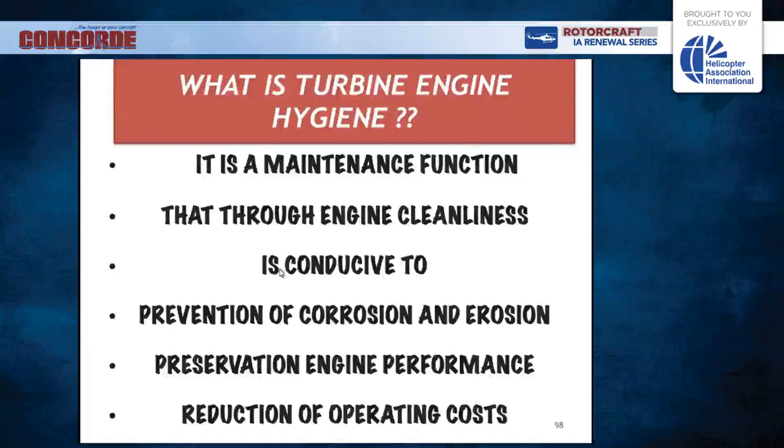Corrosion and erosion are removed or mitigated with using enhanced pure water. The airborne contaminants, which we've gone through, are of course controlled through the use of water.

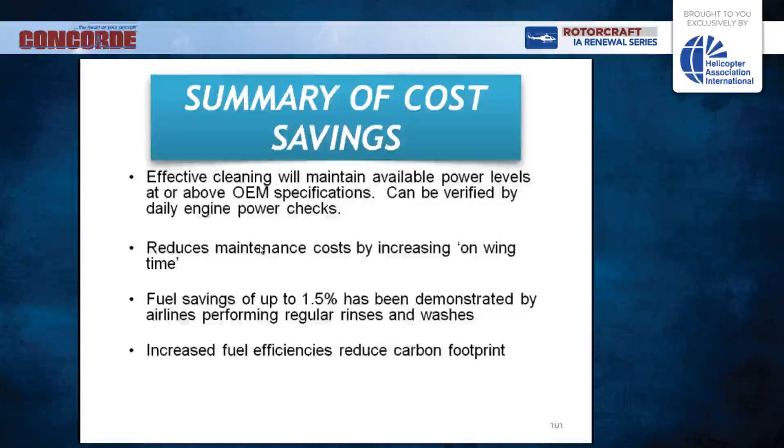The summary of cost savings: effective cleaning will maintain available power levels at or above OEM specs. You can find that out with a power check. It reduces maintenance costs, as we've talked about, and fuel savings, as we've talked about. Increased fuel efficiencies reduces the carbon footprint. All of these savings are money back into the pocket of the operator.

When do we perform our engine hygiene maintenance? After the last flight of the day, after the completion of the final flight of the day for the aircraft's flight schedule. This is usually the last maintenance activity for the shift.

I know you've got to wait until the engine cools down, and of course your beer low-level warning light is flashing on while you're waiting for this to happen. But believe me, this will create a better atmosphere in the hangar when the helicopter is out flying instead of being in there with you working on it.